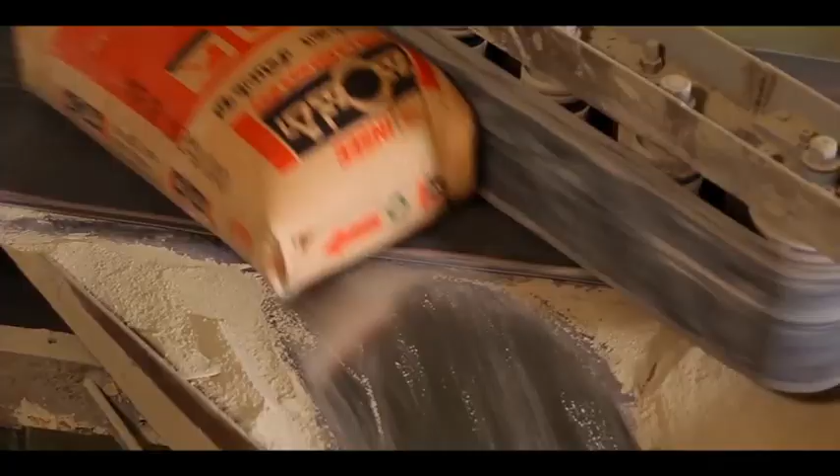INSEE Cement, Sri Lanka's premier cement manufacturer, is the brand behind our country's leading cement products and the driving force behind making Sri Lanka more sustainable. With a reputation built on outstanding performance in the quality of our products, unparalleled customer service, the dedication of our employees, our respect for the communities in which we operate, and our ambition to set the standards for the industry of tomorrow, we have contributed to the growth of Sri Lanka with iconic developments across the island.

Just to name a few: the Lotus Tower, Altair Residencies, the Colombo South Harbour, Southern Expressway, Mattala Airport, the Kalladi Bridge, the Kotelawala Defence University, Mahinda Rajapaksa International Cricket Stadium.

INSEE has cemented its position as the most preferred local manufacturer of cement in Sri Lanka, with its widespread distribution network comprised of over 7,000 dealers in the retail segment located island-wide. Today we have 2 plants in Puttalam and Galle and 2 terminals in Galle and Colombo.

INSEE's Sunstar brand is Sri Lanka's first cement product to be awarded the Green Labelling certification by the Green Building Council, and was the first blended cement to launch in Sri Lanka.

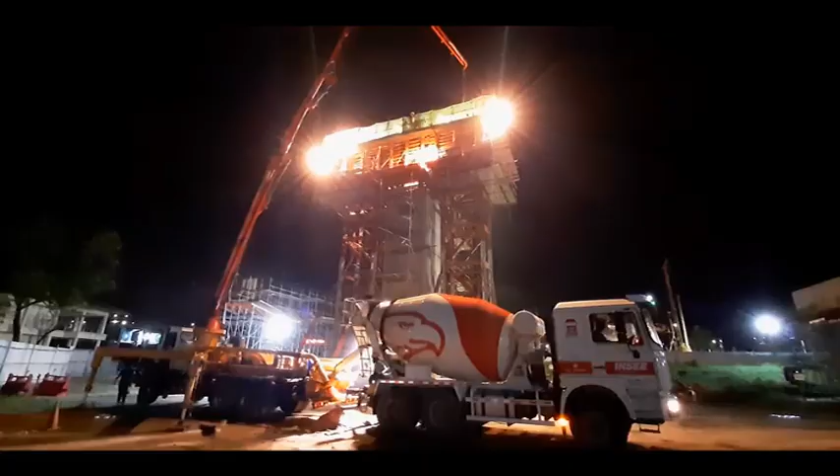INSEE has a wide portfolio of cements and services to suit all your construction needs. The most popular among them: INSEE Sunstar, INSEE Mahaweli Marine Plus, INSEE Extra for mass pouring concrete, INSEE Rapid Flow Plus, INSEE EcoCycle, INSEE Concrete, Convert by INSEE, state-of-the-art innovation and development facility.

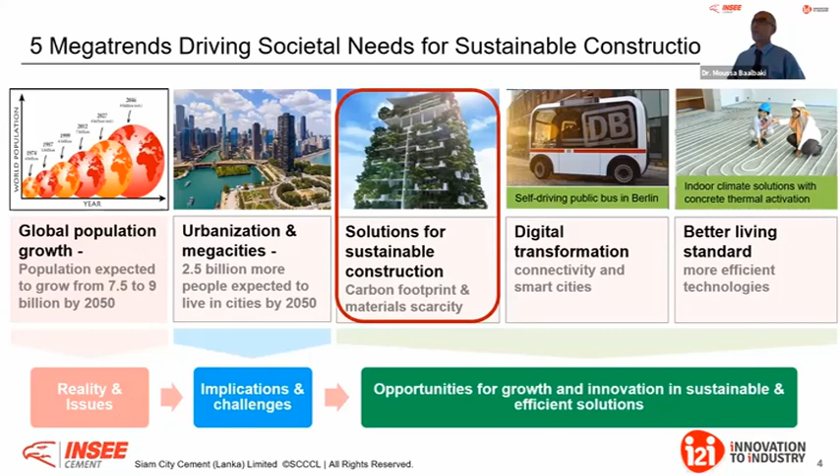If we look at solutions for sustainable construction, we have been discussing together several knowledge sharing topics in our knowledge sharing space. We have run more than 14, 16 topics. First, for example, we started with Professor Nanayakkara, who introduced the concept of durability for mass concrete.

He explained to us in a very holistic way the measures and precautions to take when you talk about mass concrete. After that, I introduced sustainable performing concrete, especially the high performance part. After that, Professor Ranjith Dissanayake from Pera University discussed the importance of sustainable construction for Sri Lanka.

Tushara, Dr. Tushara from Open University. When we talk about sustainability, of course, we talk about a very low CO2 footprint product, but now we can go even beyond conventional mineral components, products that can replace the conventional, that go beyond this normal mineral component.

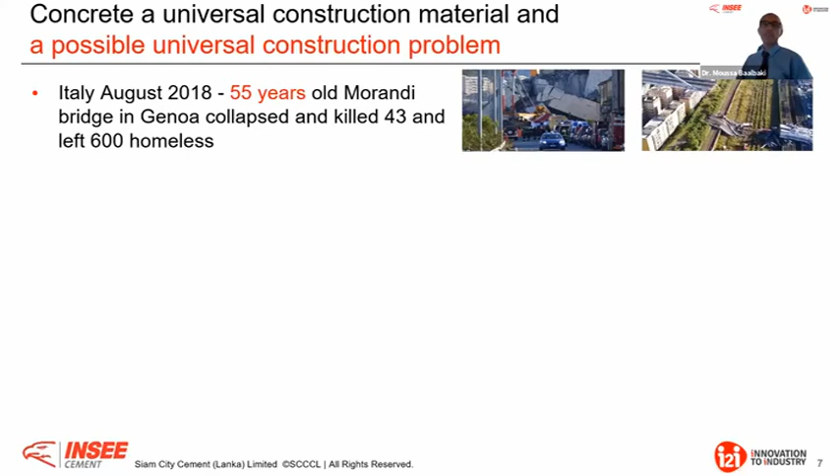The first example comes from Italy. You have all heard about the Morandi Bridge collapsing, a bridge only 55 years old, with 43 people killed. That was in August 2018. Unfortunately, this happened again just beginning of this month, less than 4 weeks ago - another bridge, 58 years old, a 300-meter bridge that collapsed in Aulla.

Another tragedy could have happened - the bridge was deserted due to coronavirus containment measures. Otherwise, this is a highly congested bridge during peak hours, and that could have been another tragedy. When we look at these two bridges and at the map of Italy, you see these two bridges are very close to the Mediterranean Sea, and those bridges can suffer a lot from exposure conditions due to marine structure.

For the first one, the old Morandi Bridge that collapsed in Genoa, corrosion was one of the main reasons. Therefore, it's really important when we design those bridges to take into consideration not only the prescriptive way - the structural requirements - but also other parameters related to exposure conditions. That is really important.

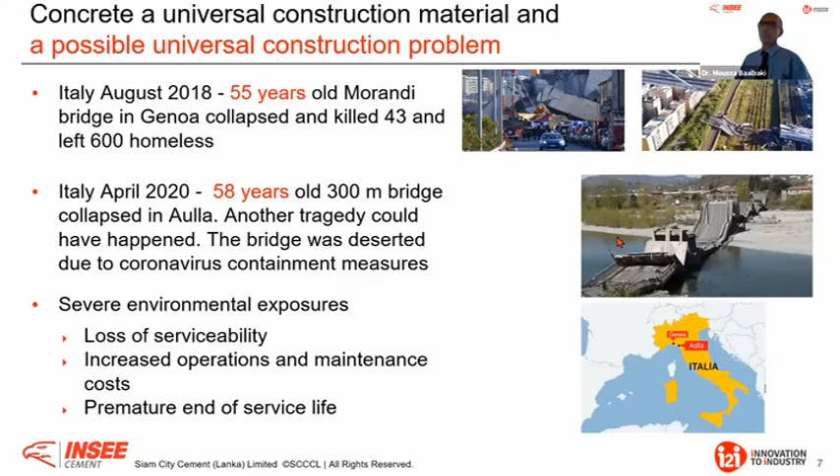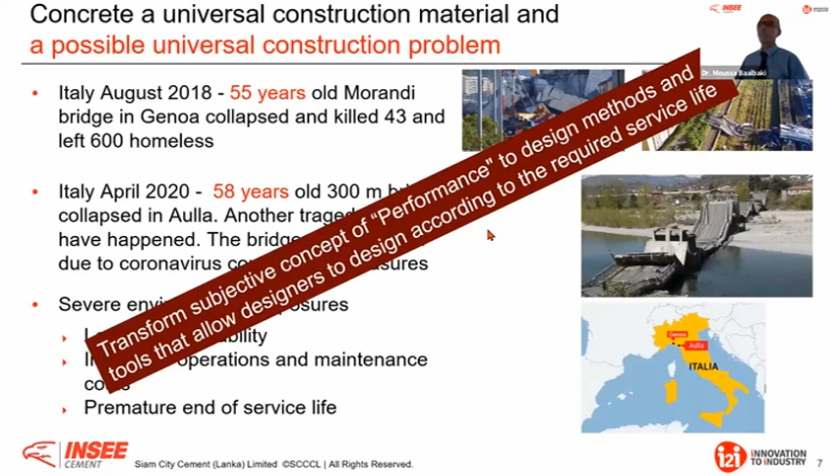When we look at state-of-the-art technology with projects all around the world, we have seen a lot of performance-based concepts - discussing low permeability, high strength, chloride-resistant concrete - that allow a designer to design according to required service life. For example, Burj Khalifa, the tallest building. In the North Sea of Europe, the deepest, longest bridges, like the bridge linking Hong Kong and Macau to mainland China, a 55-kilometer long bridge exposed to marine structure.

This mega infrastructure project has been designed based on durability indicators for a sustainable performance approach, thanks to innovative standards that allow us to push the envelope further, moving from a purely prescriptive to a performance-based approach. This is exactly the topic I'd like to discuss next, starting from the prescriptive point of view.

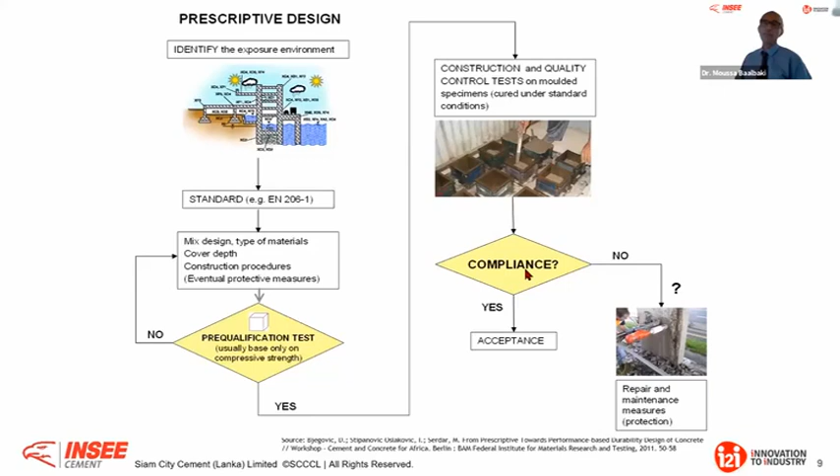Very often pre-qualification is mainly done on cubes. Even though according to concrete standards like EN 206, you identify exposure conditions, very often it's just minimum cement content and maximum water-cement ratio. Even when we talk about permeability, there is no consensus on that. So very often pre-qualification is done on compressive strengths, as you see on job sites, and you get compliance. If you don't fulfill it, you go for repair.

When you move to a performance-based approach, it's very important first to understand the deterioration mode and transport mechanism - what could happen to any object, a concrete bridge or a balcony of your house, and what kind of deterioration mode. Out of that you define durability indicators: are we going to have corrosion or carbonation? What kind of indicators need to be integrated into the mix design?

The pre-qualification tests are not done only on cubes, but also on other indicators, and those indicators are introduced into service life modeling. This is really the approach used to ensure that the expected service life of your designed object will fulfill the needs.

Now, of course, specifiers and suppliers have faced challenges in translating long-term durability requirements into specifications for laboratory testing. You will see - for those who haven't had the chance yet to visit us - our new I2I Innovation to Industry Collaboration Space. I'll come to that in a couple of minutes.

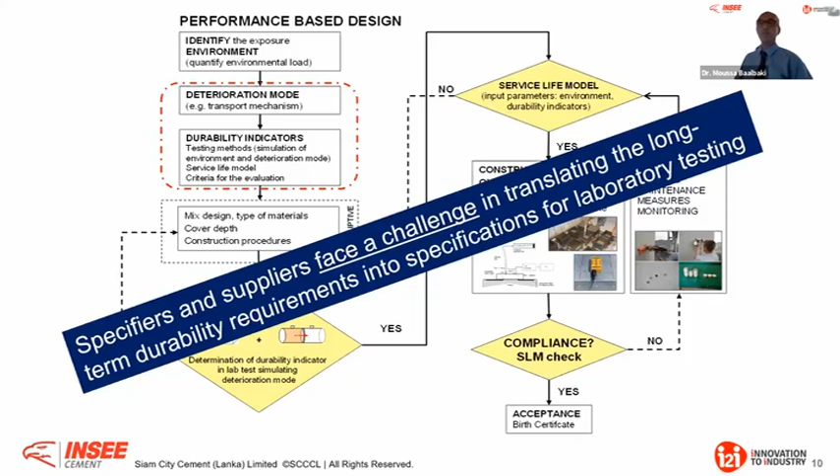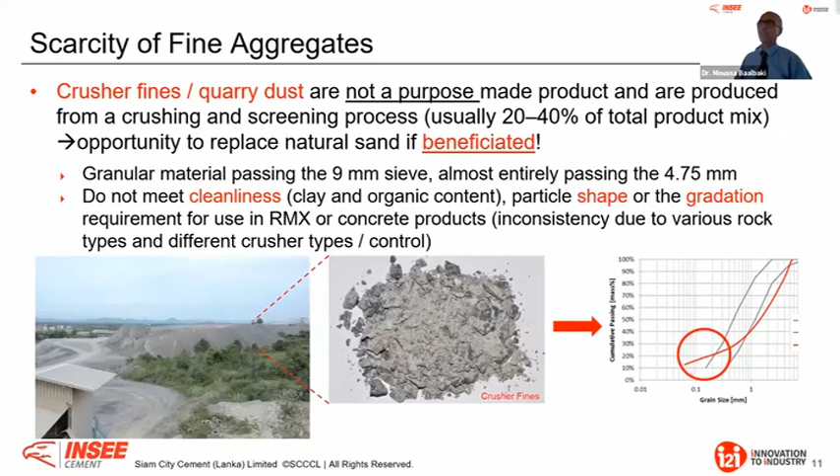At the same time, when it comes to scarcity of raw material, we discussed this topic about 2-3 months ago - that very often what we call manufactured sand is not a purpose-made product. They are really crushed fines or quarry dust compared to natural sand. These products often have a very high amount of fines, and inconsistency too, ranging from 5 to 20% passing the 75 micron sieve.

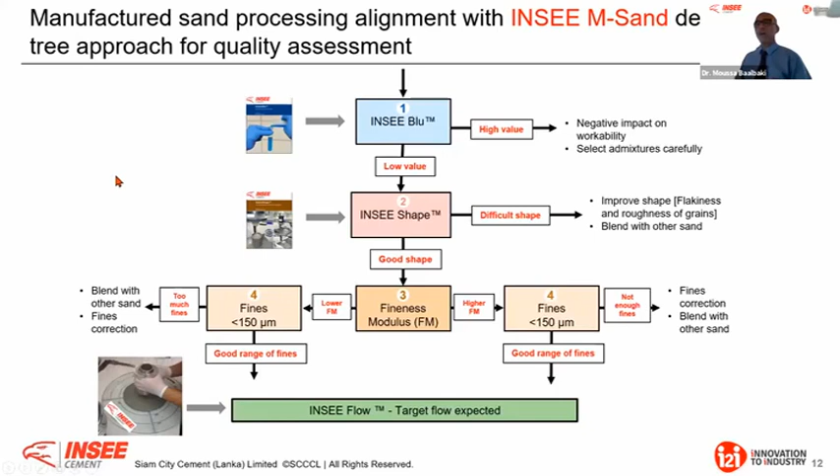At the same time, when it comes to their shape, as they are crushed, they don't have a favorable shape. So we have developed and presented to most of you a very holistic approach on how to tackle different quality indicators to achieve performance, for example in terms of flow and compressive strength, using those products. All that has been introduced in our I2I.

We were proudly happy, together with most of you, to open this collaboration space on October 31st, 2019, just a couple of months ago. This is really to engage a very effective collaboration driven by openness.

When we say openness, of course we want to do it with all opinion leaders, all stakeholders, including cross-industry, including our competitors, because with our competitors we can work a lot on what we call pre-competitive projects. I'm so happy to hear that today, even though we have some registration from our colleagues from the cement industry in Sri Lanka, I'm really glad and thankful for those people who came and showed this commitment to openly collaborate together. Now, about speed - very often it costs a lot to our country.

In Sri Lanka, it costs a lot to send samples sometimes to the UK or Singapore to get certificates, to get some performance of a product approved for a project. All this has now been introduced in Sri Lanka.

And when we talk about connectivity, we now don't just do it through face-to-face discussion or through a technical paper, but we do it directly, not virtually, but in a very concrete space - a collaboration space - where all together we can develop efficient, sustainable solutions for Sri Lanka. That is really what we are committed for. This is what Jan just said during the introduction, that at INSEE we are really committed for that. We are really committed for that.

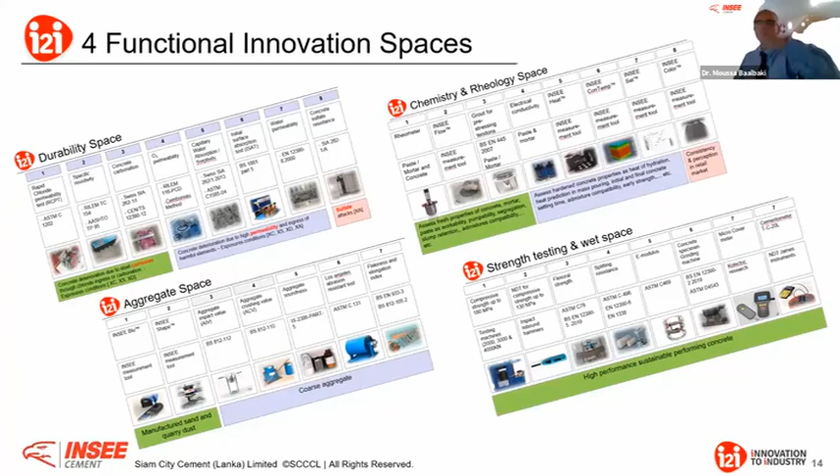All these are really important to take into consideration, because what we see in those functional spaces will really support the development of standards, since they come from the standards, and these come from academia, from the huge effort made by academia to make the proof of concept of service life modeling, so that today we can go beyond the 50-year design, the service life design.

Therefore, I come now to the next topic of my presentation about cement constituents and properties before we come to the core of the standards. I would like that we all understand the basics, because very often in terms of terminology, one person can call something mineral components, another person can call it supplementary cementitious materials. It's good that all of us understand what cement means, what the constituents of cement are. I will also give you some properties that are taken in most of the standards when it comes to clinker and mineral components.

So, cement constituents - we all know very well that clinker is the basic. When we talk about cement, it is the most relevant cement constituent, because it is the real mineral activator. That is very important, clinker.

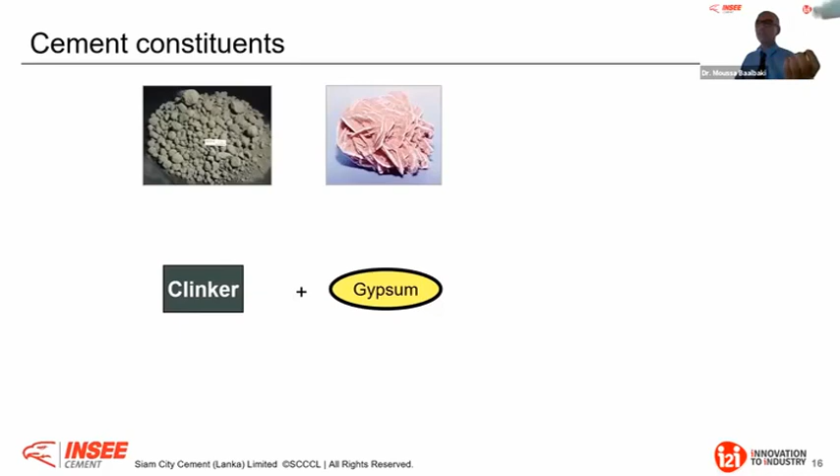After that, with clinker, we have to add what we call gypsum to regulate some phases in the clinker, and this is what we call ordinary Portland cement. Of course, we can have minor additions up to 5%. But this is our ordinary Portland cement, and this is covered by our standard, the SLS 107.

Now, if we add to these two constituents what we call mineral components, then we have what we call composite cements. I use international vocabulary, but in Sri Lanka we call it blended hydraulic cement or Portland limestone cement. The blended hydraulic will be the SLS 1247, and the SLS 1253 will be Portland limestone cement. Therefore, we have in Sri Lanka the coexistence of these three standards.

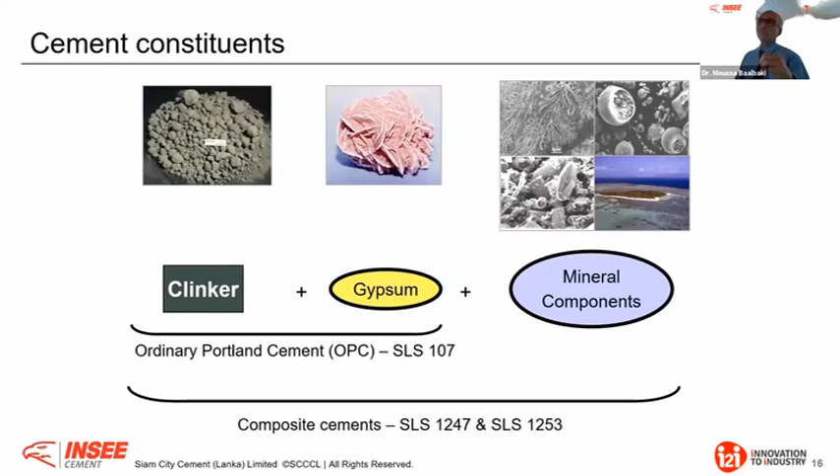Now, to go more in depth on the clinker phase, for example, we need raw material to produce clinker. As you know, in Sri Lanka we have only one facility to produce clinker, in Puttalam, owned by INSEE. Therefore, for that, we need raw material - these are oxides like calcium, ferrite, silicate, and aluminum - and here you have the most common sources.

For example, for calcium, we use calcite, we use limestone, we can use marl, you can use shale. For the iron, it mainly comes from clay, or iron ore, or mill scale, in some places. Silicate will come from clay, from marl, from sand. And the aluminum will come from clay, mainly from shale, or sometimes also from some byproduct.

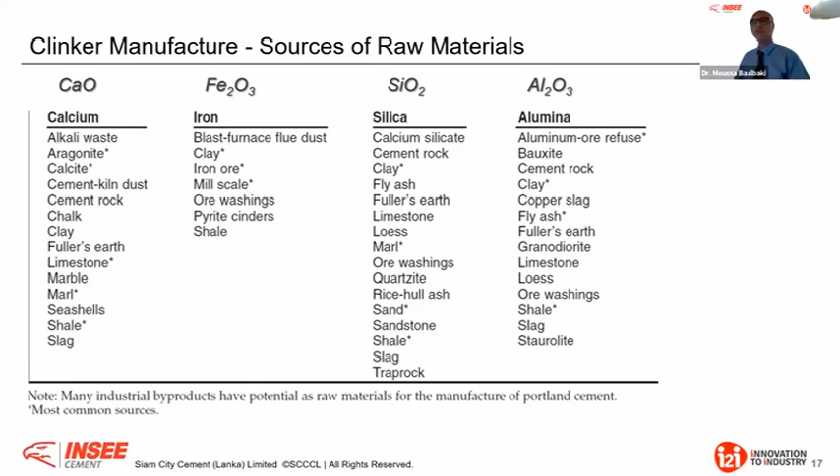Therefore, with all this material, what we call the raw materials, we produce raw meal. And that raw meal goes to a kind of kiln. In the kiln, we have two important parts: we have the preheater, and we have the core of the kiln.

When the first step is finished, the raw meal will go to what we call the calcination zone, and there the temperature can go up to 1000 degrees C. This is where the calcium carbonate will be transformed to calcium oxide with emission of CO2.

This is where the production of clinker has a very high CO2 footprint. For every ton of clinker, depending on the process we use, we produce approximately 0.8 to 1 ton of CO2, or we can say equivalent to 1 ton. For every ton of clinker, it's the same ton of CO2. Therefore, for OPC, for example, for every kilogram of cement it's the same kilogram of CO2.

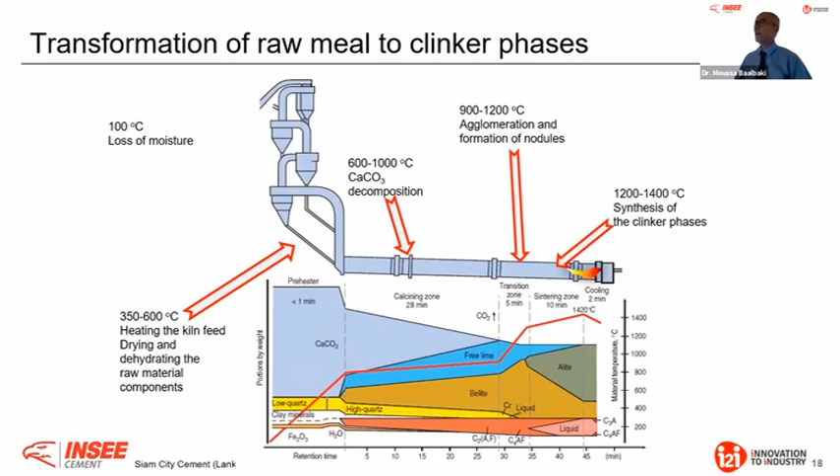After that, we come to cooling - we have to quench the clinker very fast to keep its reactivity. This transformation takes about 1 hour. One of the largest kilns in the world is owned by our group in Saraburi, producing up to 10,000 tons per day. For example, in Puttalam we can go up to 800 to 900,000 tons of clinker per year - this is our production capacity. This is important to know when we come to standards and talk about clinker. This is how clinker is produced.

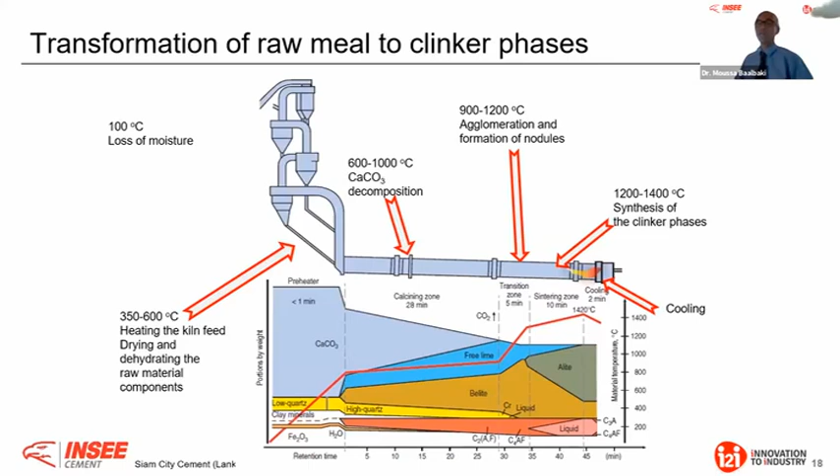When clinker combines into cement composition, the four main phases are the silicate phases - alite and belite, mainly composed of C3S - and from the liquid phase, the aluminate components which are C4AF and C3A. When it comes to standards, there are certain specifications to fulfill for each type of product. We add calcium sulfate, mainly known as gypsum, to regulate mainly the C3A. There are also minor elements like alkali sulfate, some MgO, sodium, potassium. This free lime and these are all what we call minor additions.

Now when we take this cement, produced from clinker with gypsum, and put it with water, we have a reaction called hydration. Looking at the different constituents of clinker, what's important is that the silicate phase is responsible for more than 60% of the hydrated product, calcium silicate hydrate. You will see later this is exactly what gives every single performance, every megapascal we achieve when we produce concrete. And we have what we call portlandite, or calcium hydroxide.

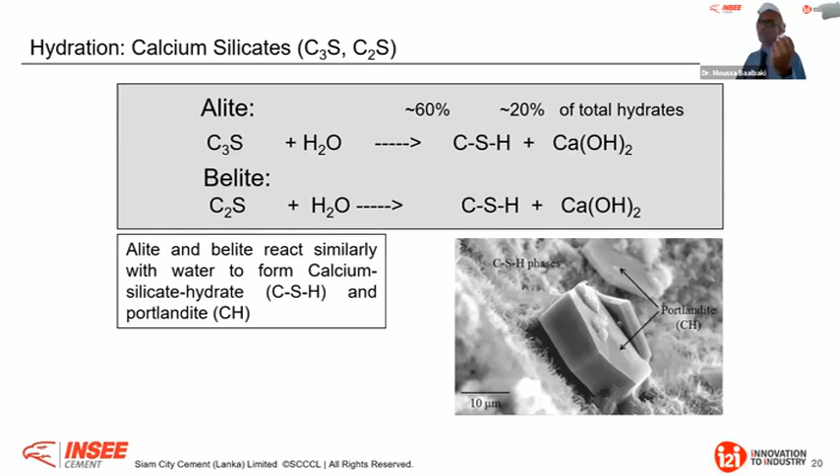Now, when it comes to aluminate, it needs to be regulated with calcium sulfate. Otherwise, you have what we call problems with stiffening, or sometimes false set. This really comes from a non-well-regulated C3A.

Therefore, the main product is ettringite, which forms after just a few seconds. It's a very important cement hydrated product because ettringite will control the right dissolution of all the ions we need to start precipitating and keep the hydration in a normal way to pursue its development. Otherwise, if we don't form ettringite, we will form some calcium aluminate hydrate, and this will stop some dissolution. This is why when you produce your own cement, you can do some optimization, which I will show you later, because it is very important to optimize this couple between C3A and calcium sulfate.

A couple of hours or days later, this tri-sulfo-aluminate ettringite will transform to monosulfo-aluminate, which is most of the last product you find in your concrete. But one important thing, at the first knowledge sharing session, Professor Nanayakkara was talking about mass concrete, and in mass concrete we can have a problem if we don't control the temperature.

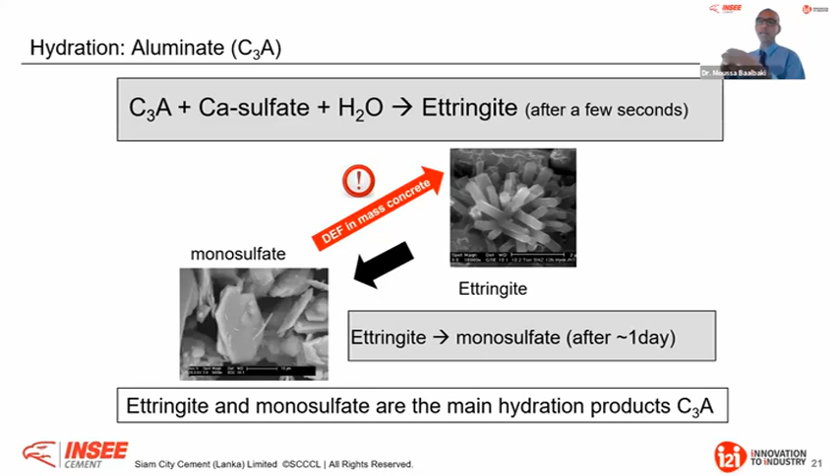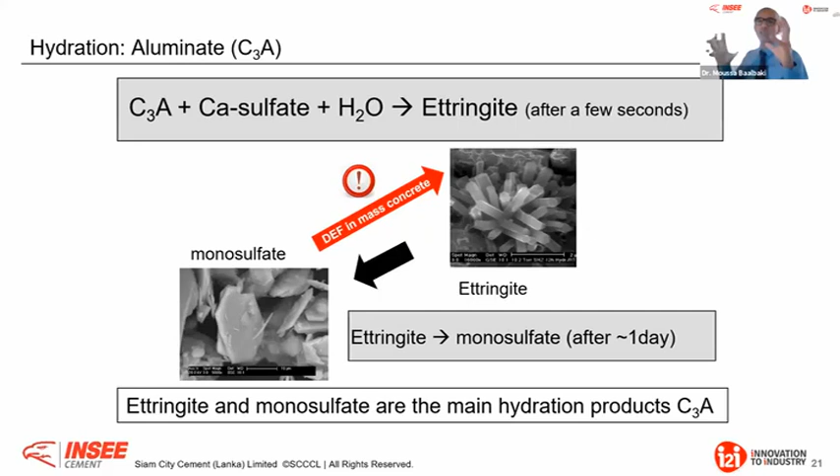This is why we call it delayed ettringite formation in mass concrete. So it's very important, when you go to mass concreting, to control the aspect of heat development, and this is why I will come later to where the heat is coming from. This is why when it comes to standards and we talk about low heat cement, how we can achieve low heat cement, in which kind of product design low heat cement can be achieved.

Now, calcium sulfate, here again, it's important when we come to constituents of calcium sulfate. Calcium sulfate can come from a natural occurrence like anhydrite or gypsum. You find this in nature, and they are really present in almost all continents. These are really a product that we use during cement production, as I said, to regulate the C3A.

But also we have alternatives to this natural occurrence, because we talk about sustainable development, we talk about circular economy, therefore how can I take a valuable byproduct and turn it into value for our industry. Very often we can see some artificial sources, what we call FGD gypsum, obtained by a flue gas desulfurization system. In this system the sulfur is removed from the flue gas, for example with the help of lime, and the chemistry of this FGD gypsum is very identical to natural gypsum, but usually with greater purity. Therefore FGD gypsum for a modern power plant can completely replace natural gypsum in almost all applications.

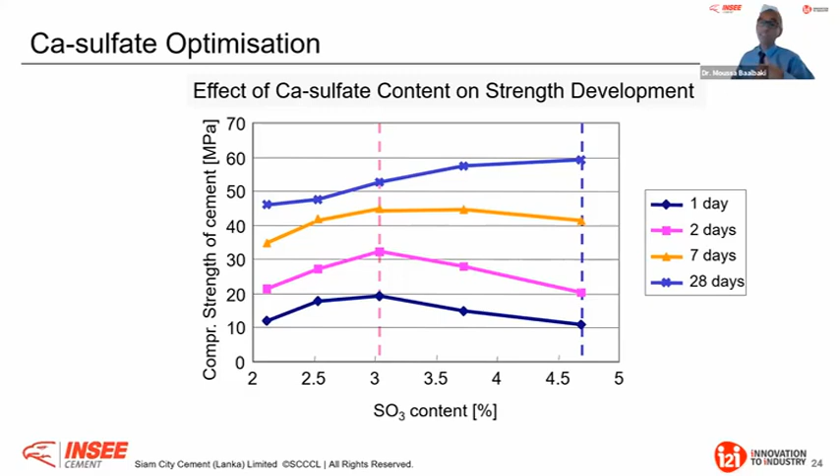Now, hydration. Hydration is very important because at the end of the day, cement is hydrated in concrete, and it's a very simple material when we talk about cement, but at the same time when we look at all the reactions that happen it is quite complex. Therefore, this simple material has very complex reactions, and it needs to be understood in order to fully take advantage of great product and great technology to achieve great performance.

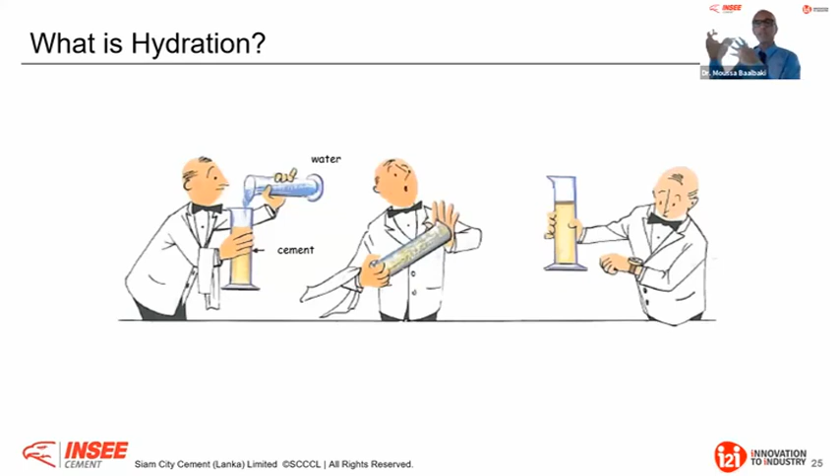Now, when it comes to hydration, what we do first is we have your cement, you have your water. Over time when you mix them, you produce what we call a hydrated cement paste, and you have a certain porosity. This is water, and when this water dries up, you will have a certain porosity.

But within the cement hydrated phase, you have pores. These are small pores, but you have what you call the gel pores, and those pores will have part of the water that is chemically, structurally bound. Like when you talk about calcium silicate hydrate, tri-calcium aluminate hydrate, calcium hydroxide, you have water that is chemically bound—these are the gel pores.

But you have capillary pores, where the water is not chemically bound, it is only physically bound. Therefore, in some hygrometric conditions, in terms of relative humidity or temperature, we can lose this water, and this is why you have what we call volumetric change, and this implies shrinkage. This is very important—we understand at this level that cement hydration is a really important link to concrete performance. We need to master and understand the basics of that.

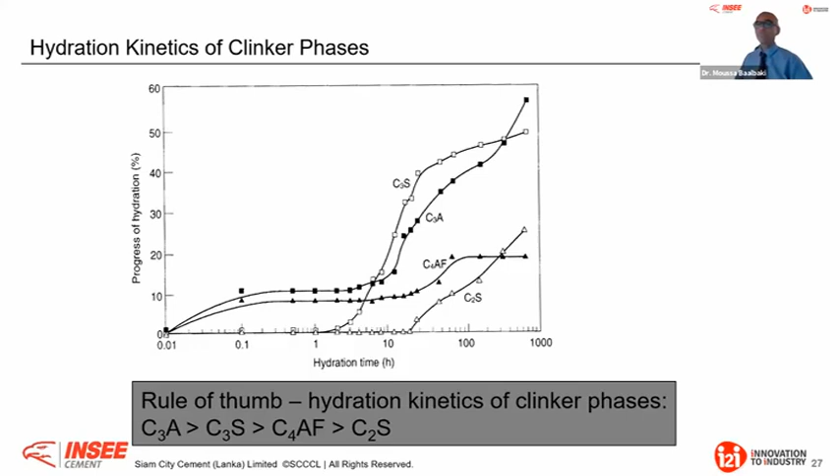After that, we come to the concrete side. You go from fresh concrete to hardened concrete. The aggregate stays aggregate sand in the microstructure. You have an interfacial zone of transition between the hydrated cement paste and the aggregates.

In this case, I will almost not have any water-filled pores, so no more porosity, or just a little. I will have a very dense microstructure where most of the pores are gel pores because they have fully participated during hydration, where the water is chemically bound. But in reality, most of our applications are above this water-cement ratio.

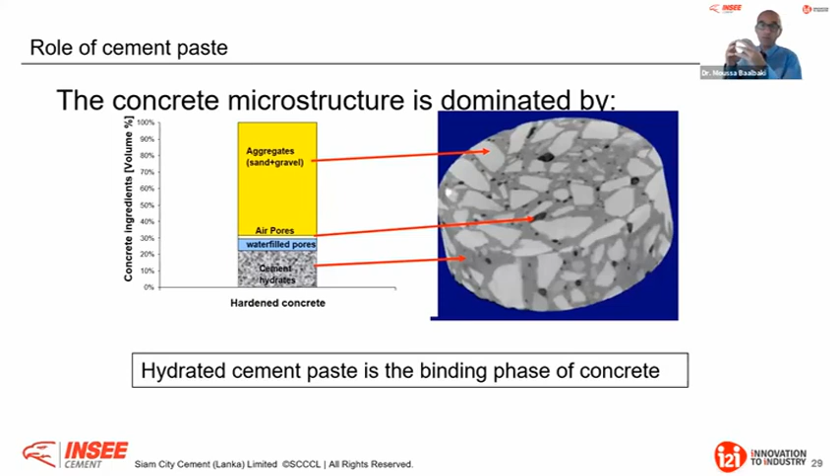Not because your OPC has somehow developed a different product - no, you always develop the same product: calcium silicate hydrate, calcium hydroxide, trisulfate monosulfate aluminate. The difference is in terms of porosity, depending on water-cement ratio, depending on capacity, and depending on other parameters I will come to shortly.

Now this is a scanning microscope image of a cement hydrate paste. You see that even when we fully hydrate our cement paste, we still have a lot of porosity. That is the question here.

Sometimes two concretes having the same compressive strength, one will be more permeable than another, just because of the porosity. And when you talk about porosity, I'm not talking about 1 millimeter scale.

When we look at calcium silicate hydrate and talk about the size, we are below 50 nanometers. Therefore, if you produce your concrete and redefine your microstructure to have less than 50 nanometer porosity, you have a very dense concrete.

And when you go above 50 nanometers, now you start to have more of this open porosity. This is where some challenges in terms of durability can happen. Prescriptively, it's very difficult to assess this, so we need to go to a performance-based approach.

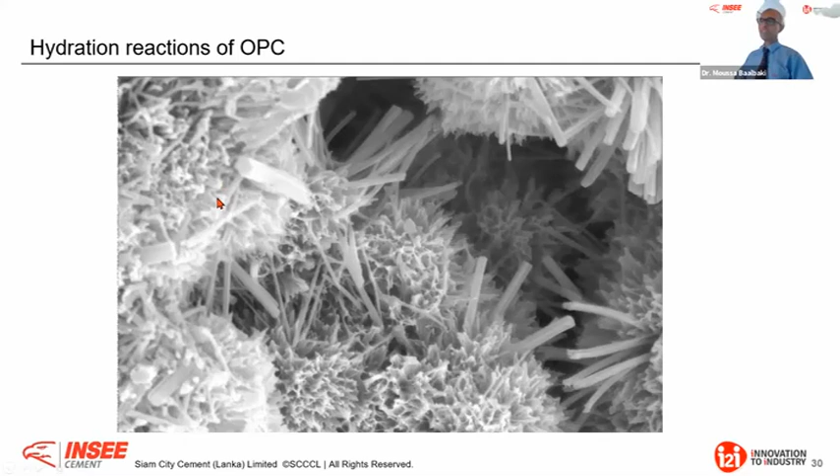This is why when it comes to cement constituents, if we add mineral components to OPC, we end up with a series of products called composite cement. We can call them blended cement, blended hydraulic cement - different names are given - but generally speaking, we talk about composite cement.

And those composite cements have feature advantages and benefits when it comes to how we can complement the hydration reaction, providing to the microstructure of concrete - and this is all in standards - a refinement of the microstructure. It's like having a sand with a certain grading where I'm missing fines.

If I miss fines, I have very coarse material, so I can have bleeding. What I can do is close this gap. This is exactly when it comes to microstructure - very often it's not only chemical, but physical, a physico-chemical effect when it comes to refinement of the microstructure.

Now, those mineral components - I would say the most classical ones are granulated blast furnace slag, fly ash, natural pozzolan, limestone, or other fillers. Now how do we classify them? Let's do it simply, in terms of reactivity. When we start with slag - slag is a byproduct from the pig iron industry.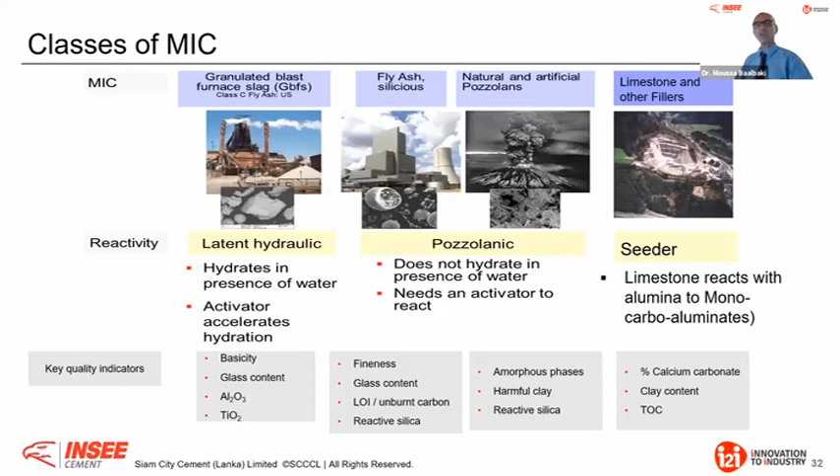You will see, for example, in the EN standard, you have the low grade, what is L, and the high grade, LL. And that is what we have in Sri Lanka - a high grade, for example, our limestone. So you see there are quality indicators, and this product has been used for decades. Indeed, if I look at the legacy - this is our legacy.

In 2013, we used a total of 140 million tons in our portfolio all around the world, and out of that, about 40 million tons were these mineral components. So these technologies are proven and standardized, and this is what we are going to discuss.

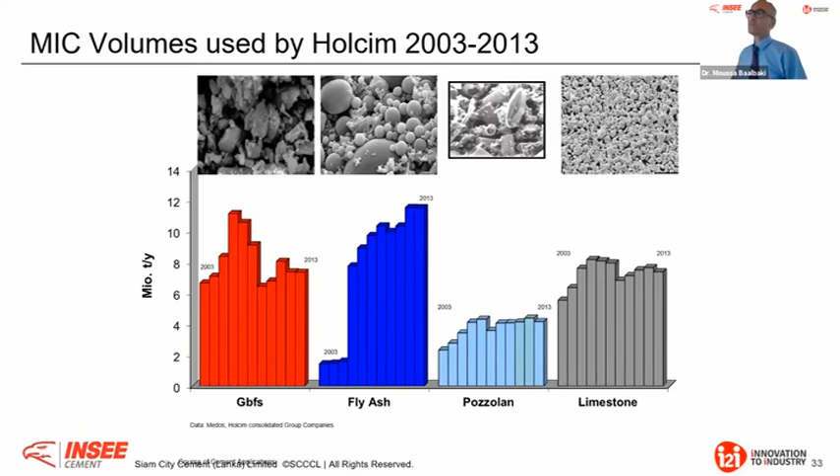Chemically, when I look at those products and put them in a ternary system of calcium, silicate for basicity, and aluminate, you see what you have. You have latent hydraulic products, OPC, with a basicity always above 2, blast furnace slag with a good one over 1, and class C fly ash from bituminous or lignite coal, mainly found in the States and very little in Germany, with a certain basicity above 0.5.

These are what you call latent hydraulic, the truly hydraulic ones, and then you have the aluminosilicate ones. These aluminosilicates are not reactive, like silica fume, a very noble mineral component, but silica fume alone is inert. Any of these materials are inert, so you need to activate them. The activation comes through calcium because they have the silicon.

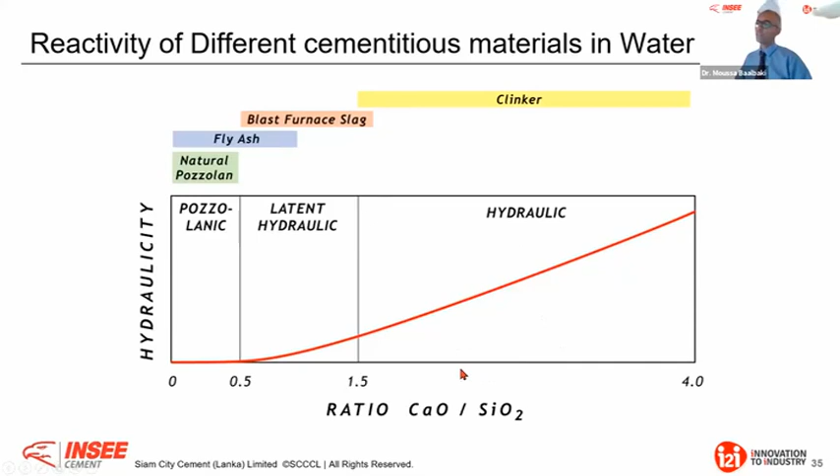This is why, when we look at the calcium-to-silica ratio, pozzolanic material has basicity below 0.5, latent hydraulic is between 0.5 and 1.5, and above 1.5 we come to hydraulic like clinker. Very often I say clinker is above 2. This is what matters when it comes to hydration.

I have presented this to some of you, but for those who haven't seen it: in the hydration reaction of OPC, we see the silicate phases. In the presence of water, you form what we call the calcium silicate hydrate, the CSH—very small fibers in the microstructure, with length below 50 nanometers, as I said. And you have portlandite, which are big crystals.

Strength comes from calcium silicate hydrates. Very often, when you have difficulty in terms of durability, it's because these are soluble. Even though it's important to keep a certain basicity, a certain pH, to protect reinforcement in concrete, too much of this product will also create other big problems in terms of durability.

This is why when we combine them in a composite cement design, we have another reaction called the pozzolanic reaction, not the hydration reaction, which will complete this and turn the excess calcium hydroxide into calcium silicate hydrate. Very often this happens after, let's say, 28 days, and generally after that.

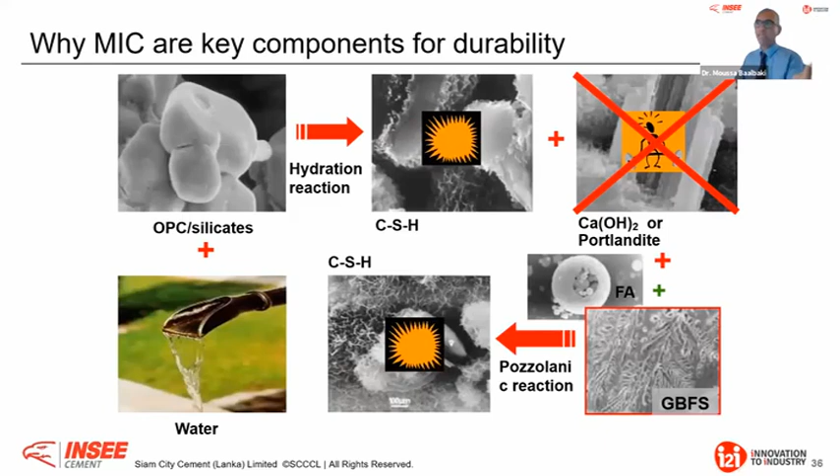When we come to leachability, when any problem happens, if I look at calcium hydroxide levels from OPC at different percentages of fly ash or slag, you see the amount of calcium hydroxide drops drastically. We will always have enough to keep a certain basicity, a certain pH, in your concrete to protect the reinforcement—definitely, there's no worry about this. But what's more important is that the dissolution, or leachability, will show high chemical resistance, just because we are eliminating a soluble salt, a kind of soluble salt that is portlandite.

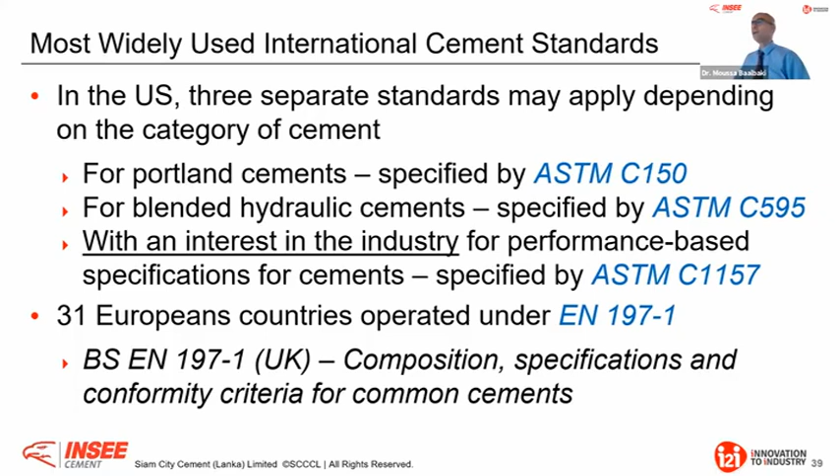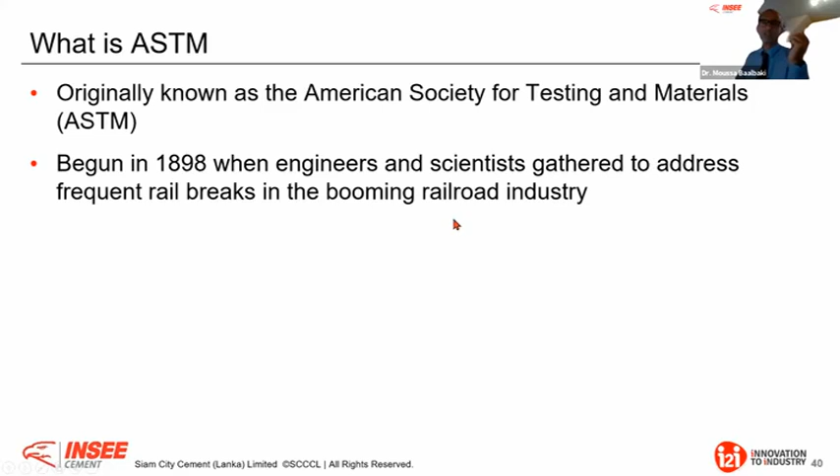Now, what is ASTM? Since I graduated from Canada, I'm very much used to ASTM standards, but it's good that I give you some historical background. It's originally known as American Society for Testing and Materials - this is why we call it ASTM. It began in 1898 when engineers and scientists gathered to address frequent rail breaks in the booming railroad industry. Today it's known as ASTM International, and when you refer to ASTM standards, it's international - one of the largest voluntary standard development organizations in the world today.

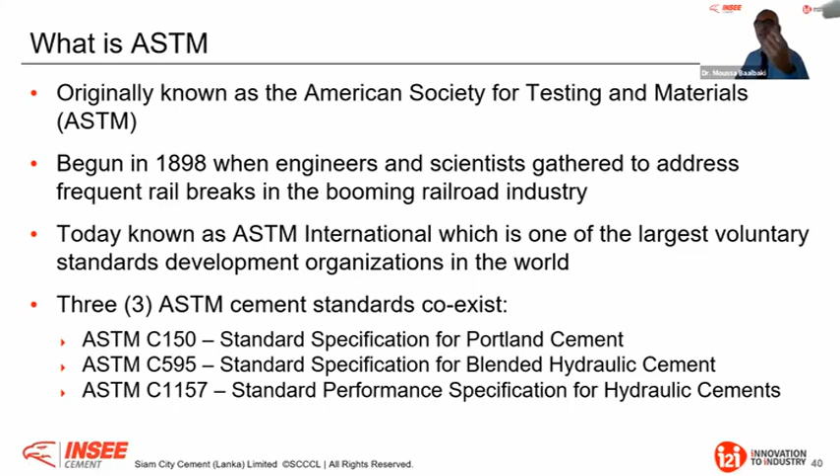As I said, there are three coexisting standards: the C150, the C595, and the C1157. Now, for ASTM C150, that is the standard specification for Portland cement. Originally it was approved in 1940, just before the Second World War ended in 1945. This standard prescribed ingredients and proportions, but with some performance requirements, because originally it was a purely prescriptive standard.

And last year performance-based requirements were introduced, so this standard was updated. This standard covers 10 types of Portland cement. Type 1 is used when special properties specified by another type are not required. I would say type 1 is like our SLS 107, part of it - because here we have strength classes in Europe that we don't have in ASTM, but SLS 107 can be compared to type 1 ASTM C150.

But you also have type 2, that is for general use with moderate sulfate resistance. Within type 2, there's a subcategory called type 2 MH - this is when you have moderate sulfate resistance but also moderate heat of hydration. So type 1 is your OPC general use, type 2 will be your moderate heat and moderate sulfate, and type 3 is for your high early strength.

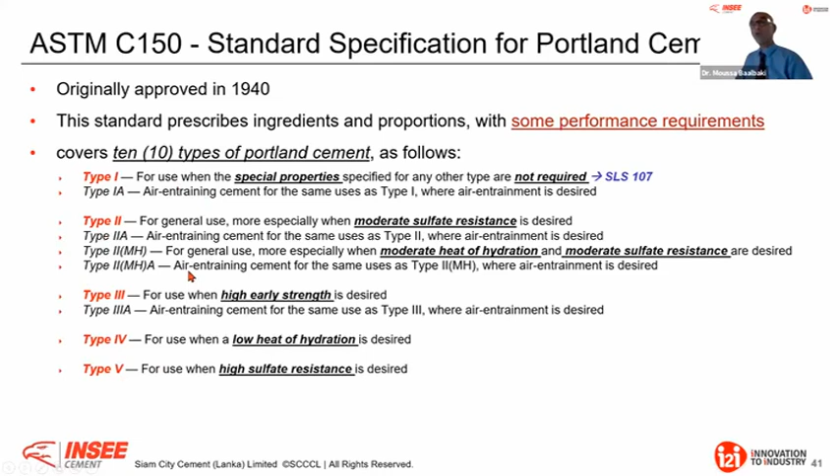Now, when it comes to the prescribed chemical composition here, again you see the requirements. First, it is said in note 2 that it's important that before you specify them in your market, you assure that those products are available.

They don't prescribe a type 4 when nobody produces it in your market. That is important. After that, the chemical requirement is prescriptively chemically done. Okay, you have aluminum content maximum 6%.

And now you know when we talk about moderate sulfate and moderate heat, okay, why we have for the type 2 the requirement on aluminum content.

Okay, now Fe2O3 iron, you have also 6% maximum, and the code says here clearly that does not apply when sulfate resistance limit or when heat of hydration limit are specified. And this is the performance base, I will come later to it. Okay, therefore you do not have to fulfill this requirement if you make a performance based test.

Okay, now magnesium oxide, okay, therefore you have limitation 6%, it will be 5 for European for SLSI. This is for magnesium oxide.

After you have SO3, depending if you have less than 8% or more than 8%. You see, when more than 8% here, you cannot apply it for moderate sulfate and moderate heat, because this is a product that develops heat, and problem with sulfate is from the C3A.

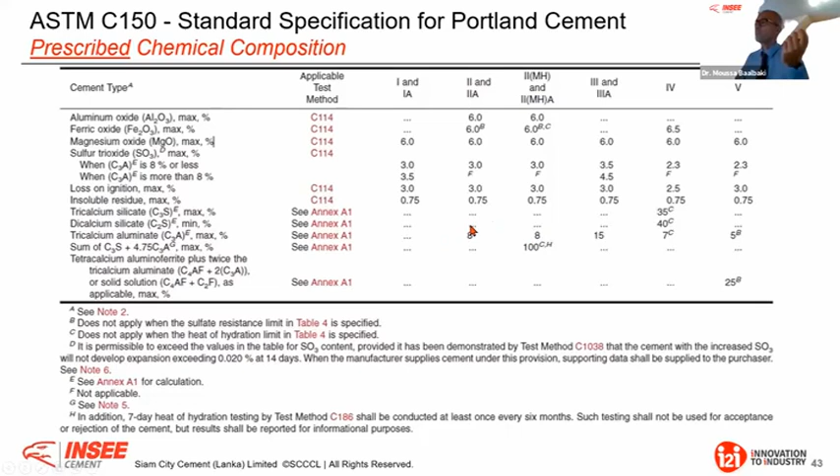If you come here, the requirement for when it comes to C3A, 8% and 5%, what you see, 5% here, okay? And the C3A for the moderate, where I can find here, the C3A maximum 8% here, you see? 8% for moderate, and 5% for high sulfate. This is what you can see here.

Okay, that is optional. Therefore, I can produce, for example, high early strength cement, and I demonstrate that my C3A is below 8% or my C3A is below 5%. In this case, okay, I can declare it as moderate or high sulfate resistance.

And for alkali, okay, you have a test here on equivalent alkali for low alkali cement. Okay, but it's clearly specified here that this is not mandatory if you don't have reactive aggregate. It's only when the aggregate is reactive. When it's not reactive, you can go above 0.6.

Okay, because the main problem with alkali, you can go at 0.7, 0.8. Okay, only the problem is when you have a reactive aggregate, okay, you have to stay below 0.6. This is from the OPC based.

And from the physical requirement, okay, you have air content, especially for air entrained, 22% maximum, okay, and minimum 16%. Okay, that is really the requirement, 22% and 16% when you entrain air.

And when you do not entrain air, it's 12% maximum. And when you know the ratio, if you measure the air content in your mortar, it is about 5 times what you get normally, average value, compared to what you get in concrete.

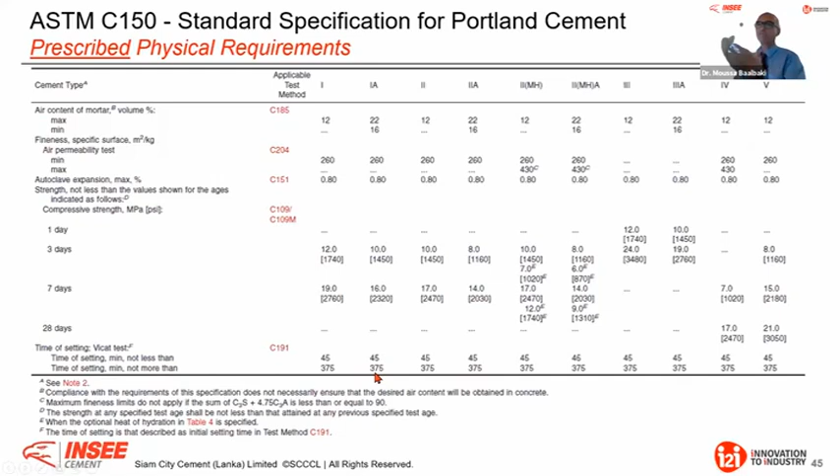Again, for setting time, here they have a requirement of 45 minutes minimum. And they don't specify final setting, only initial setting, with minimum and not longer than 375 minutes. Therefore minimum, maximum, these are the two requirements.

Now these are the optional physical requirements, table 4, that is performance based. Therefore what it says is, for example, if you do a false set test, if your final penetration is 50%, SO3, you can increase the amount, no problem. For the heat of hydration, therefore C3A, you can exceed the limit if you can assure that for your moderate heat and moderate sulfate, you have 290 for the heat at 7 days, and when it is for low heat cement, it's 250 and 290 at 28 days.

This is performance based, it's not prescriptive, it's really performance based, because you do the test and you look after your performance. Now, in terms of compressive strengths, again, there is a limit, but they are very, very close to what is physically required.

Now in terms of sulfate, you see they have a sulfate resistant test at 14 days, and it is required only for type 5. Type 5 is the high sulfate resistance OPC based. And for the other type, here it's mentioned that cement meeting the high sulfate resistance limit of type 5 is deemed to meet the moderate sulfate resistance requirement of type 2, and type 2 moderate heat. Therefore you have to fulfill this.

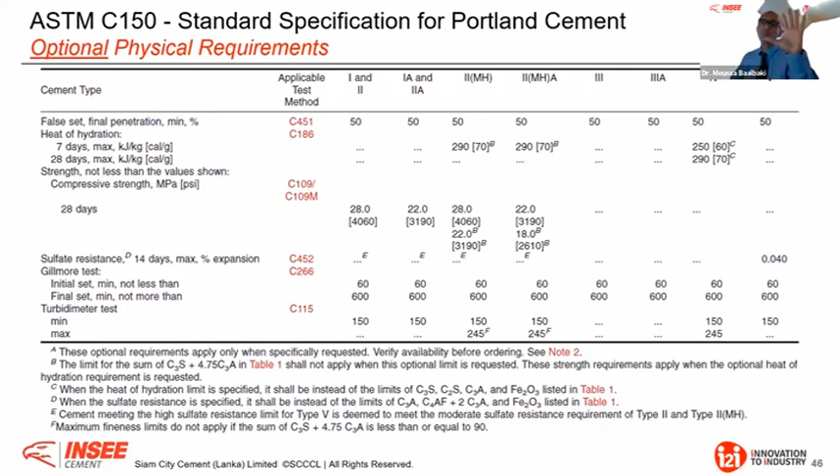And they have also a test on the turbidimeter, where they will give some limitation, because this is what I always say to my colleagues when we talk about Blaine. Normally air permeability Blaine test is for OPC, is really for OPC, but very often it is much better to compare them with particle size distribution than Blaine. That's important to mention here also. Therefore that is about the C150, and as you could see, the C510... C150 is really OPC, 5 main type products: general use, moderate heat, moderate sulfate, high early strength, low heat, and high sulfate resistance. That is OPC based.

In the EN, you know very well it is fixed water cement ratio, graded sand up to 2 millimeters. We use a shock table, a vibrated table, and you have prisms. In the ASTM, it's different. For OPC it's fixed, water to cement ratio 0.485. For blended cement it's variable, because you achieve a certain flow test, it's not a fixed water cement ratio. After that, for the sand, they have a mono-grain sand called Ottawa sand, very fine sand. They use a tamper manually to compact, and they use cubes.

Therefore, when we compare - and this was done by our lab, at our R&D center - as we were in the ASTM market, we tested the same cement in both standards. You see the 3 days ASTM is relatively equal to 95% of the 2 days. This is why I say it's relatively low in strength. And for the 28 days, the ASTM is equivalent to 75% of the 28 days. That is somehow the kind of trend we can have.

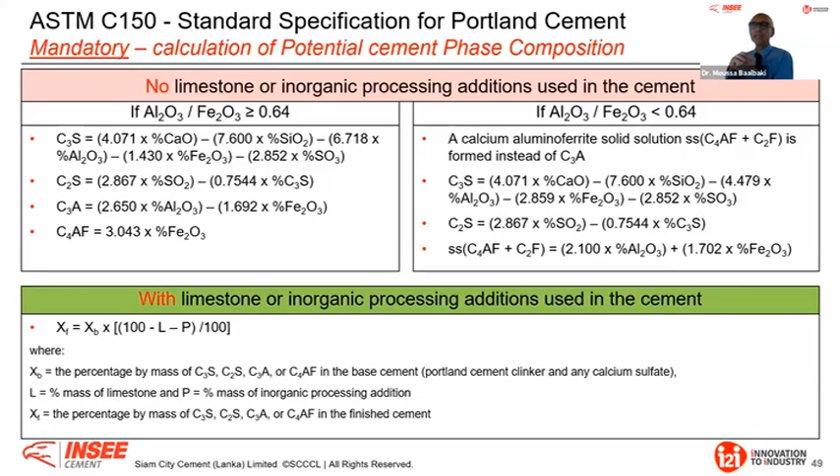Also, when you use limestone - very often a cement producer produces OPC without limestone, and also OPC with limestone, and they will always report the Bogue calculation without considering the limestone. Therefore, you need to consider the limestone: you take your reference clinker OPC value without limestone, and you correct it by subtracting the mass percent of limestone and the mass percent of inorganic mineral processing addition, if used. You have to do this correction. This is very important because very often we are talking about C3S and we do not take this into consideration. Now, that is the OPC based ASTM.

Now, when you come to the 595 standard, that is blended hydraulic cement. It was approved in 1967, and the standard stayed the same for years, though some performance requirements have been added. Therefore, the 595 that I knew 20 years ago is not the same as the 595 we have today. It covers 7 types of blended hydraulic cement, and in terms of terminology, they call it blended hydraulic cement, for both general and special applications.

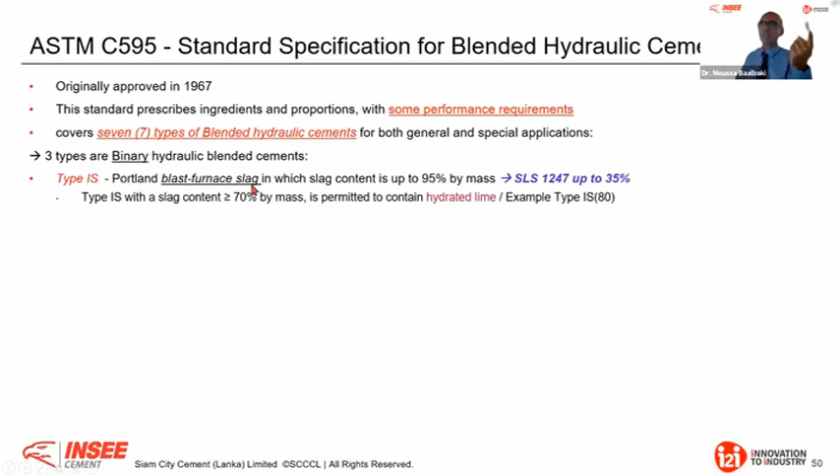Now, we have 3 types that are binary hydraulic blends. When I say binary, I mean clinker plus 1 mineral component - both hydraulic - therefore they are binary hydraulic blend cements. You have type IS, which is slag based, what you call Portland blast furnace slag, in which the slag content can go up to 95%. This is somehow equivalent to our SLS.

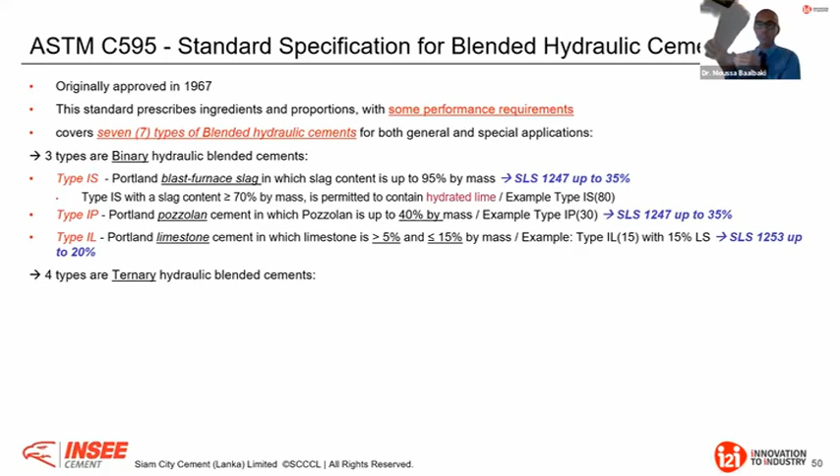These are multiple blends, we'll discuss about it. What is interesting here, you see you can have 2 pozzolanic materials, maximum 40%. Not 1, you can add 2. Okay, and this will be the type 1T for ternary.

After you have the type 1T SP, where you can put 2 mineral components, in this case slag and pozzolan. Maximum will be 70%, but you cannot add more than 40% of pozzolan. You see, in all these 595, maximum in pozzolan is 40%, limestone 15%. Slag you can go up to 95%. But in the ternary system, when we talk about the type 1T SP, maximum will be 70%.

Okay, now you have the type 1T, this is now pozzolan and limestone. Ternary blend, when maximum pozzolan will be 40% and limestone 15%. Therefore, here we cannot go to 70% because there is limitation. Pozzolan 40%, limestone 15%. Okay, therefore that we will call, for example, type 1T, P more than L. If you see this, this means you have pozzolan and limestone, but the proportion of pozzolan in this ternary system is higher than the limestone.

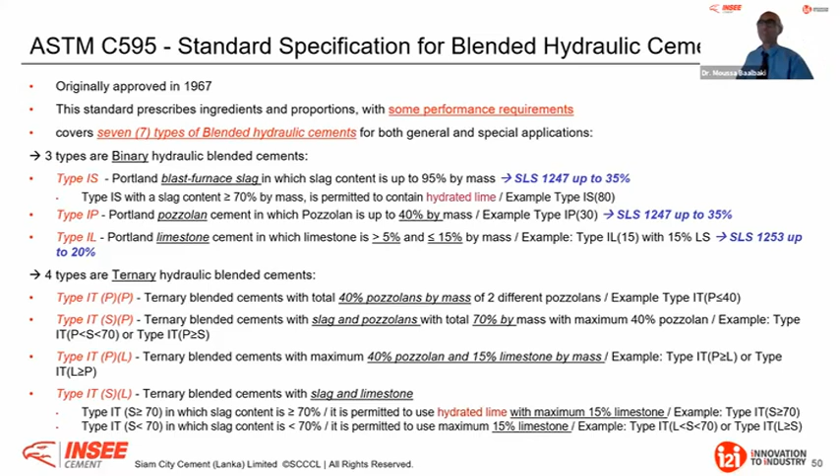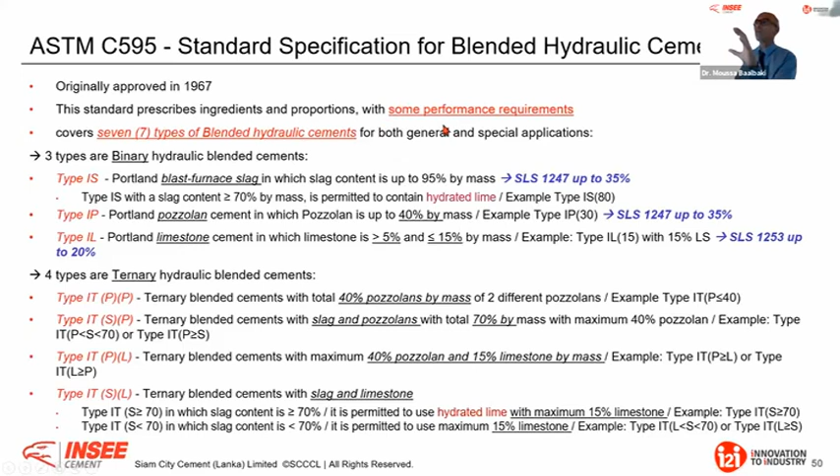Here we have 7. And if I now go to the 595, if you look at the special property for sulfate and low heat, because the 7 types of blended cement, as I said, here blended hydraulic, these are for a common cement.

Now, you have for sulfate resistance, okay, where attributable to special characteristic of slag, pozzolan, and limestone. Therefore, you can have, for example, a type 1P, okay, that is moderate heat. For example, 1P here, that is moderate heat. Therefore, you have to add MH, okay, for moderate heat. And this is equivalent, for example, to the type 2 moderate heat in ASTM 150.

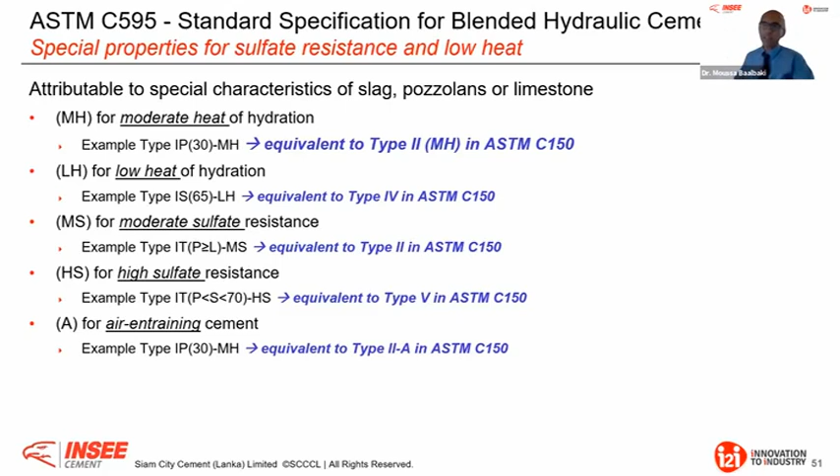This is the version OPC based, and this is the version blended cement with the same attribute. Okay, same for low heat, same for moderate sulfate resistance, same for high sulfate resistance, and for air entraining. Therefore, you see in the 595 is like your 150, the clinker base, but it is the version of blended hydraulic cement. Okay, you have blended hydraulic cement with exactly the same attribute, in terms of low moderate heat, low heat, moderate sulfate, high sulfate, and air entrainer. Now, important what I said here, similar special property as OPC. Therefore, what you achieve with OPC, you achieve it also with blended hydraulic cement, according to the 595.

Now you have here the prescribed chemical composition. Now you see it shrinks very much. Therefore, we have MgO, okay, limitation only for pozzolanic material, for the type IP, okay, and IT, and here the type ternary is when the pozzolan you see here is higher than slag or limestone, maximum 6%.

After you have the sulfate reported as SO3, 3, 4, 4, 3, but you see there is a B here, and the BC is, for example, it is permissible to exceed the value if we demonstrate that according to the test method here, the 1038, okay, there is no increase, the increase of SO3 will not develop expansion above here, 200 micro deformation, 200 micrometer per meter after 14 days. This is a pure performance-based test. Pure performance is very innovative. Therefore, do whatever you want. If you fulfill the performance requirement, you are qualified.

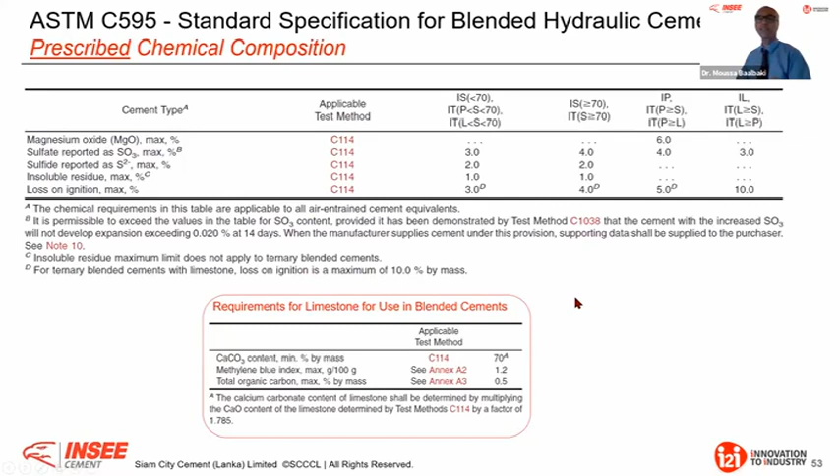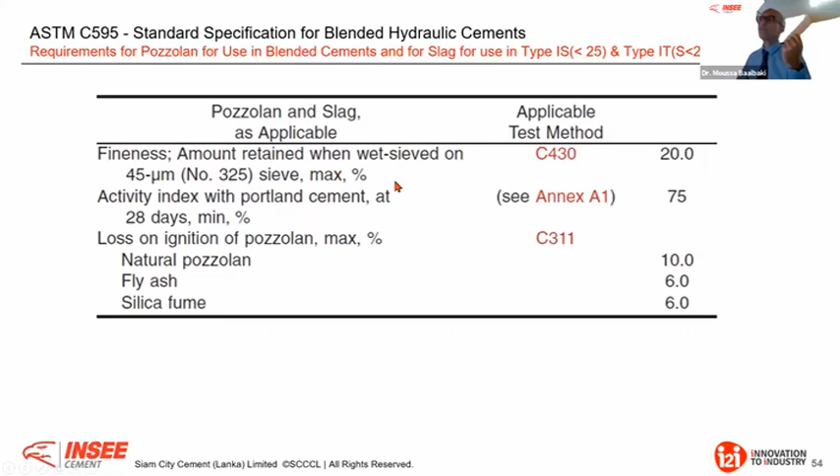Now, requirement for pozzolan: to use a pozzolan or a slag to blend the cement, or a ternary system slag-based, when the slag is below 25%. There is a requirement on the fineness for the slag and for the pozzolan. For example, the maximum in wet sieve on the 45 micron cannot be more than 20%. If it is too coarse, you cannot take it.

Activity index, 75%. I will explain what is activity index. Performance based. LOI on the pozzolan, if it is natural pozzolan, is 10%. Fly ash 6%, we are around 5, what we accept. Silica fume 6.

Activity index: we have our reference mix with OPC, and we substitute OPC with, in the case of pozzolan, 35%, and in the case of slag, 70%. Clinker factor here, 35% less, here 70% less. And our activity index at 28 days should be 75% of the reference. I should achieve 75%. If you test at 56 days and 90 days, you are above 100%.

Now, the 595 standard has physical requirements on fineness and density. You just have to report it. There is no limitation, you just need to report it.

Now, on autoclave expansion, there is a maximum value here, 0.8 and 0.2 for all categories here. And it says the specimen shall remain firm. Therefore, you have to assure that you don't have any expansion due to autoclave, like magnesium or free lime.

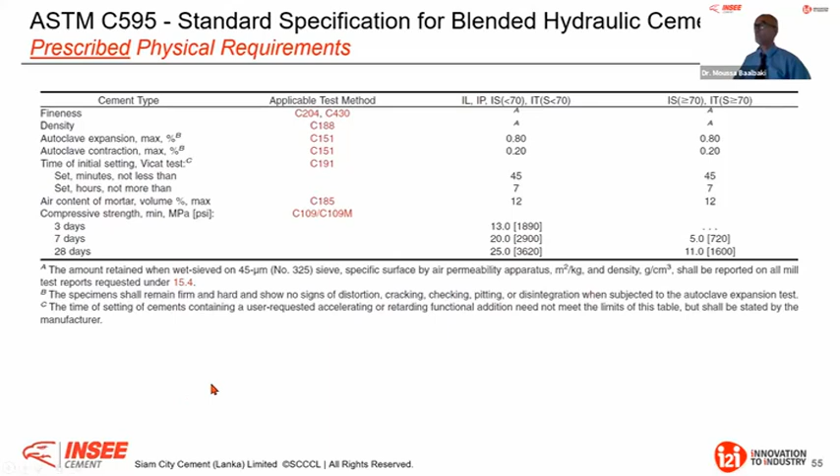Now you see heat of hydration. That is important, the heat. It is said that you have for moderate heat and low heat requirement at 3 days and at 7 days requirement. You have some requirement to fulfill.

For compressive strength, nothing special. For air content, nothing special. Of course, 12% when you don't have air, and when you have air, 16 to 22.

Now, you have requirement for water requirement. This is according to the compressive strength test. As I said, this test is not a fixed water cement ratio. You have to fulfill a flow of 100 to 115% of the reference mix.

Therefore, you should not have a water cement ratio above 64 when you are talking about low heat, and there is no requirement here. When it is for low heat, you should not have a water requirement above this value. Therefore, maximum water cement ratio is 64 to test, and you should achieve at 28 days minimum 21 megapascal.

Minimum 21 megapascal. Therefore, you also have sulfate resistance requirements. That is very interesting because this will give you the expansion limit. At, let's say, for moderate sulfate resistance it is at 6 months, high sulfate resistance at 6 months here is 1000 micro deformation, here is 500 micro deformation.

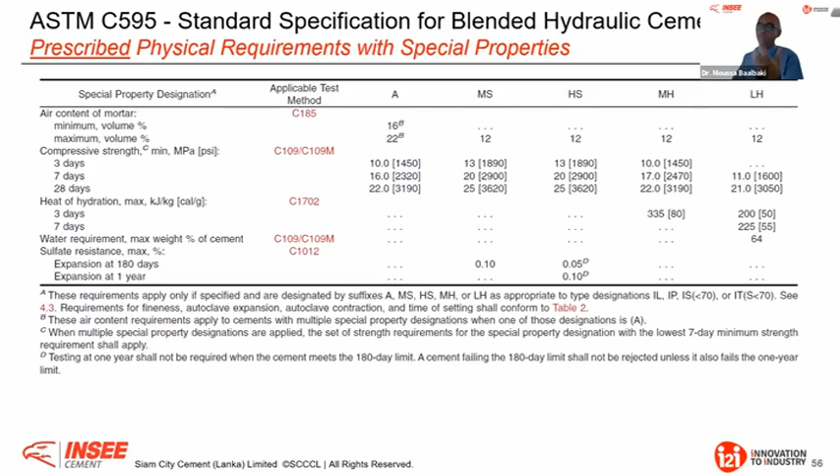They have performance based requirements like OPC, where prescriptions are not only on the chemical composition. That is also important to note. Now, the last one is the ASTM 1157.

This is standard performance based. This is only a 4-page standard. Just remind me, the Australian standard cement is the most simple one to understand for engineers and to fulfill. Really very simple, straightforward, very performance based.

This was originally approved in 1992, and there is no restriction in terms of composition and constituent. They classify cement based on specific requirements related to concrete performance.

Therefore, for general use application, for high early strengths, for resistance to sulfate attack, and for low heat, this is exactly the same as what we saw in 150 and 595. There is no real difference, and then you have optional requirements approved for the property of low reactive alkali silica.

Because on the 595 there was a limitation for alkali silica reaction in terms of alkali content, and they took it out. It is on the 1157, and it is said that this is optional only for the 595. Here in this case it is optional for alkali silica reaction and for air entrainment.

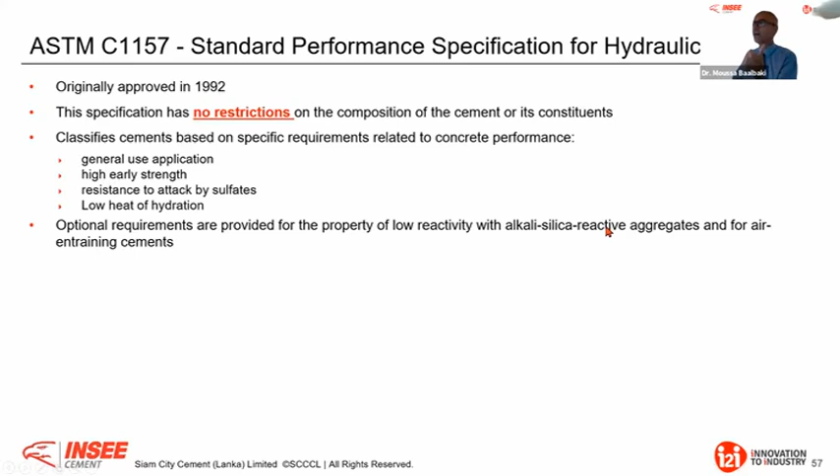Therefore, if you want to have A or not A, it covers 6 types. And therefore, as I say, this is equivalent really to the 150 and the 595, but with no restriction in terms of composition. General use, high early strength, moderate sulfate, high sulfate, moderate heat, and low heat.

And you have option R that was in the previous 595 blended cement, the version 2000. The 2014 version it was there, and now the 2020 it's not there anymore. The 2020 was approved in April, the beginning of this month. It was approved, and they took it out.

And you have an option for the 1157 for alkali silica reaction, at 0.6 for low equivalent alkali, and option A for air entrainment. Therefore, here the chemical composition is not specified. However, the cement shall be analyzed for informational purposes.

Important note here: concrete performance, as stated in the standard, depends on many factors like characteristics of other concrete materials, like aggregate, like superplasticizer, like water, the mix design, and the water cement ratio. Therefore, very often, don't over-design your cement content.

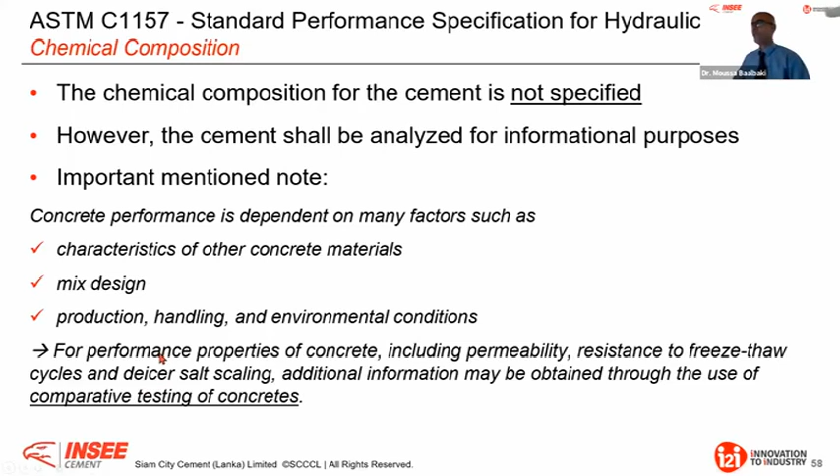Modeling fulfillment. Now, the physical requirements: fineness has to be, of course, somehow measured. Autoclave expansion, maximum 0.8, not less than and not more. For setting time, 45 minutes and 420 minutes.

This, as I said, is 32.5 R at 2 days. Therefore, you have the 3 days, 7 days, and 28 days. And the 28 days, even though not required for high early strength, for moderate sulfate resistance, and for moderate heat - not required. The heat of hydration is only for moderate heat and low heat.

After that you have mortar bar expansion at 14 days, and you should not exceed 200 micro deformation. And also they have the sulfate expansion. This mortar bar, by the way, is not autoclave.

The mortar bar test is to see if you have internal sulfatic attack. Because when you have a sulfate problem, it can be internal or external. When we talk about sulfate resistance here, according to the 1012, this is external. But according to the 1038, it is internal.

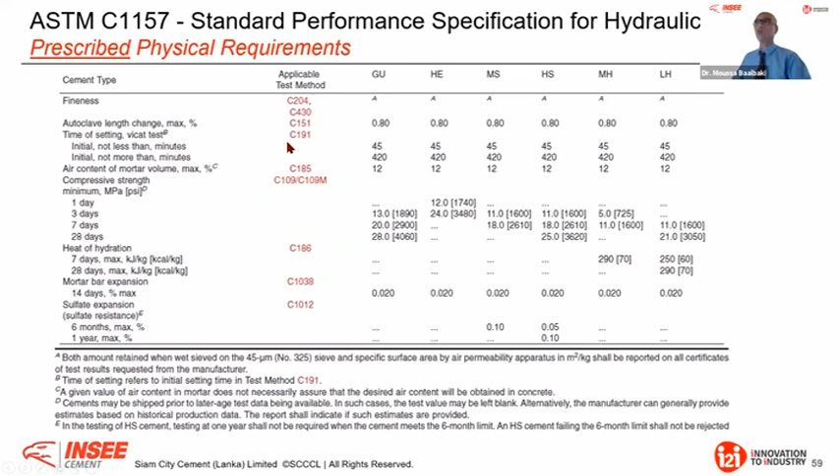Because this performance standard tells you, whatever you want to put as SO3, optimize your compressive strength, but it should not exceed 200 micro deformation after 14 days. Very performance based. That is all about the 1157 for the physical requirement.

Now they do a stiffening test, which is a penetration test: 50 maximum, minimum 30. And for compressive strengths, you have only 22 MPa for moderate heat, 22 for moderate sulfate, and 22 for moderate heat.

And you see they have one test that is drying shrinkage. Normally the drying shrinkage is made on concrete according to 1157. It was in the 595 in the previous standards - that is a blended cement. It is removed now in the 2020 version, but you find it in the 1157. This is the mortar test, where you should not exceed a certain limit, and this is only when it is requested by the purchaser.

Now I finish here with the ASTM.

Now we come to the EN 197. It was originally initiated in 1969 by the European Economic Community, and the first draft in the early 80s was given to the Comité Européen de Normalisation - this is Technical Committee 51.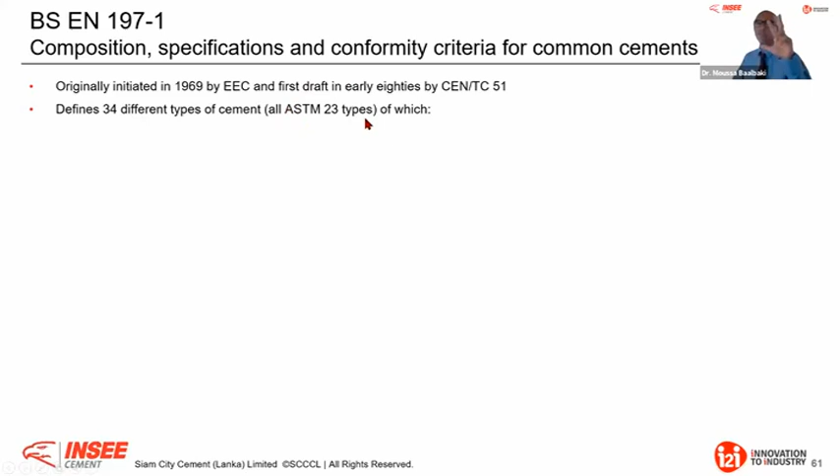Now it defines 34 types of cement in total. When you look at the ASTM, if I take the integrated three coexisting ASTM standards, we have about 23, of which you have 27 distinct common cements grouped in 5 main types of cement.

You have CEM1, CEM2 for Portland composite. Portland composite is the CEM2 - it's not blended, it's composite. After that CEM3 is blast furnace, CEM4 pozzolanic cement, and CEM5 a composite cement. You see, it's not Portland composite, but it is a composite cement - you will see this in terms of composition.

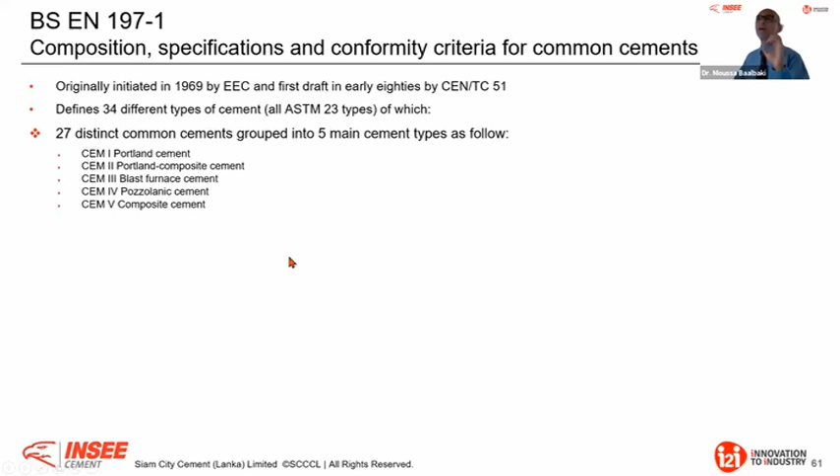These are the 27 distinct common cements, but they also have 7 sulfate resisting common cements grouped into 3 main cement types. You have sulfate resistant OPC based cement, and with this OPC based type you have 3 categories of C3A: 0%, 3%, or 5%. In Sri Lanka, we have this value here.

After that you have the sulfate resistant blast furnace cement - this is the same 3B and the same 3C. SR means sulfate resistance. There are no requirements for C3A here - this is thanks to the blast furnace slag.

Now you also have sulfate resistant pozzolanic cement - this is the same for ASR, that is what we have in Sri Lanka. I will show it on the table in the next tables. And the same for BSR.

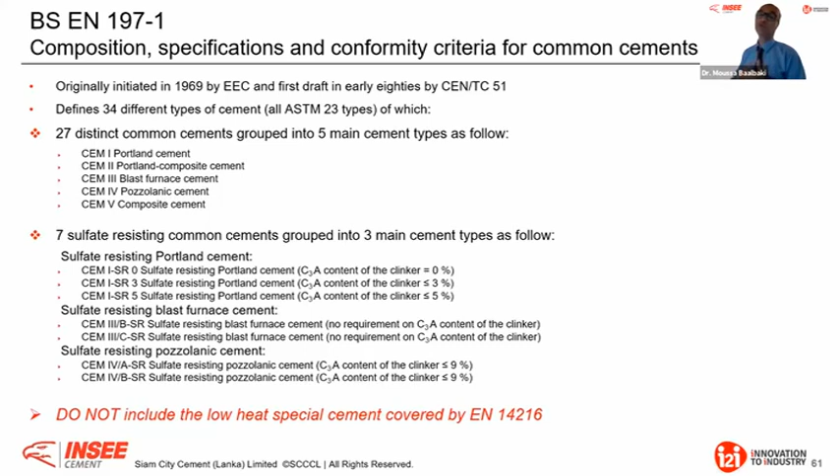I'm very interested in the topic of low heat because Sri Lanka is a country where most of our concrete is poured at temperatures of 30 degrees and plus. And if you talk to our ready-mix industry players, this is where they have the maximum challenges - this heat.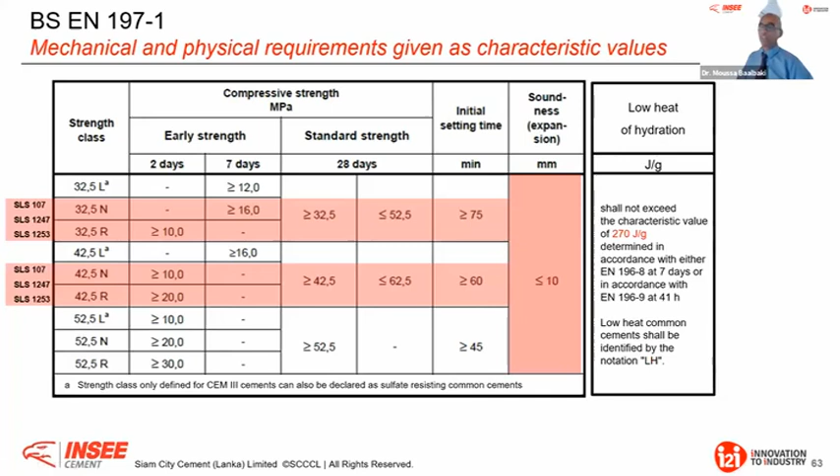When it comes to low heat, there is a requirement for low heat cement, because low heat common cements are noted as LH, they have this low heat. Therefore, we in Sri Lanka are obliged to send our cement to get the EN197, as you can read it here, EN 197-1. Now it will be version 2020 because this is the last one. You see, it's the same, 42.5, and sulfate resistance is fine.

We have it in Sri Lanka, but the low heat is not in our standard. Yes, it will cost us millions of rupees just to send it out of the country to get this certificate, and we are talking about a product that fulfills the standards. That is just a small example, but for me, a lot of innovation can be done if we can tackle this in a more objective and not subjective way.

Now, from the chemical requirements given as characteristic values here, you have LOI, insoluble residue, sulfate content, chloride content, and the pozzolanicity.

Therefore, here when I compare to our SLSI, I did not put the number because you have CEM I, CEM II and CEM IV. Therefore we have our OPC and the blended cement. And for the chloride, it is for all products below 0.1. Even though it is mentioned, if it is going for pre-stress, a value below 0.1 can be requested by the purchaser. That is really the boundary condition. What do they have?

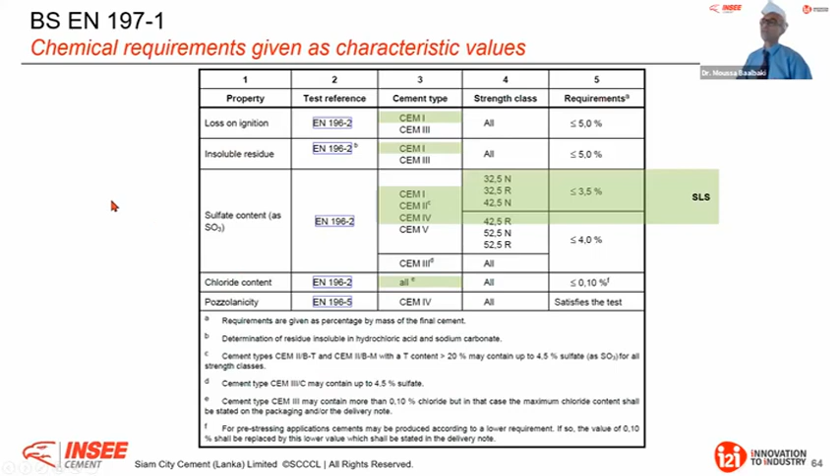And also you have here the requirements, okay? Therefore, when it comes to our SLSI, you see we have the 1247 because we do not cover all of EN197, therefore this is where we stand.

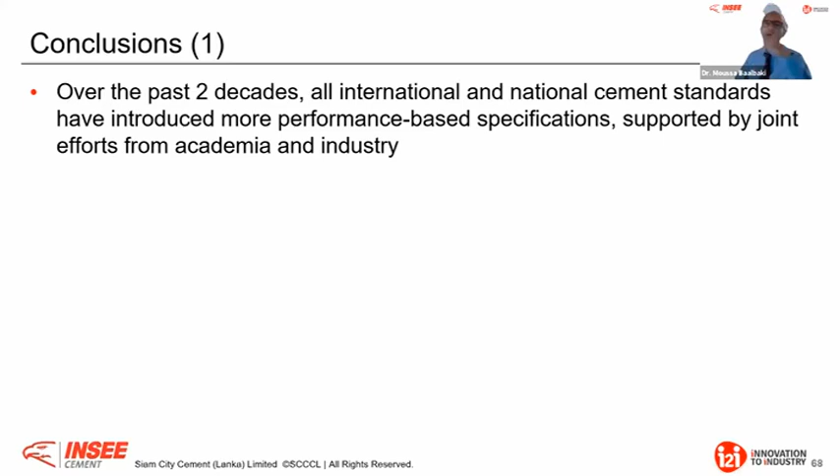We want to really collaborate together and bring more of this performance-based specification, to fully take advantage of any advanced technology that happens outside our island. Second, from a prescriptive point of view, when you look at all these standards, you can feel that it is different to compare. As I say, it's apple, but one is red, one is green, you know. It's difficult to compare the ASTM and the EN standard products, just because the chemical, physical requirements, and test methods are different.

Sand, they use Ottawa sand, very fine sand. EN, they use graded sand, 2 millimeter. Water cement ratio is not the same, and so on.

Difficult. However, what is important to mention, because we are talking about product here. Both standards have similar product composition and attributes. In both standards, you will see general use, special application, moderate heat, moderate sulfate, low heat, high sulfate. You will see all the same attributes.

Due to the need and commitment on sustainable solution development, what I see, and if you look at the statistics, development have moved all continents. The need and commitment on sustainable solution development have moved all continents. You can look at all continents.